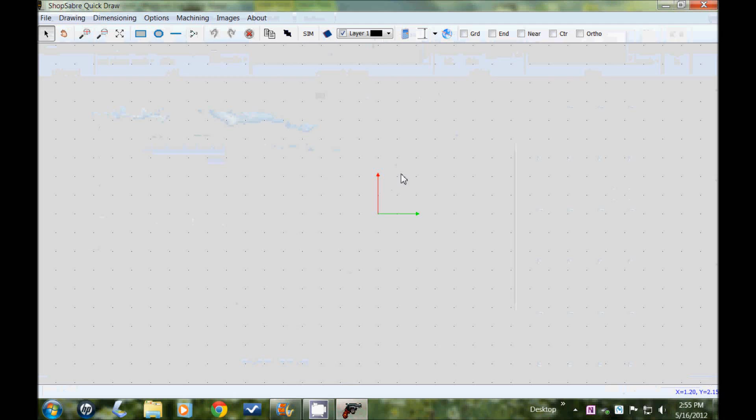What we're going to show you today is how to draw a circle flange using your QuickDraw software for your ShopSabre CNC plasma table.

What you first want to do is select the Draw a Circle icon in your toolbar. Next, draw two circles. It doesn't matter what size these circles are or where you place them, because we're going to use ShopSabre's right-click technology to edit these shapes.

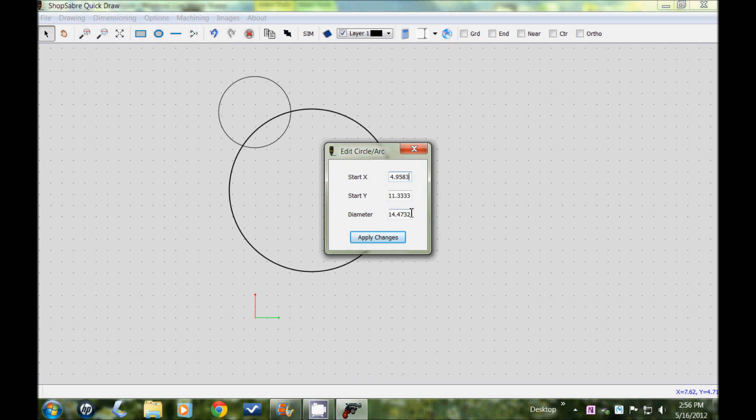Once you have the shapes drawn, select one of the circles, right-click, select Edit, and in this input box make the diameter of this circle 12 inches. Repeat this process on the second circle, but this time make the diameter of this circle 6 inches.

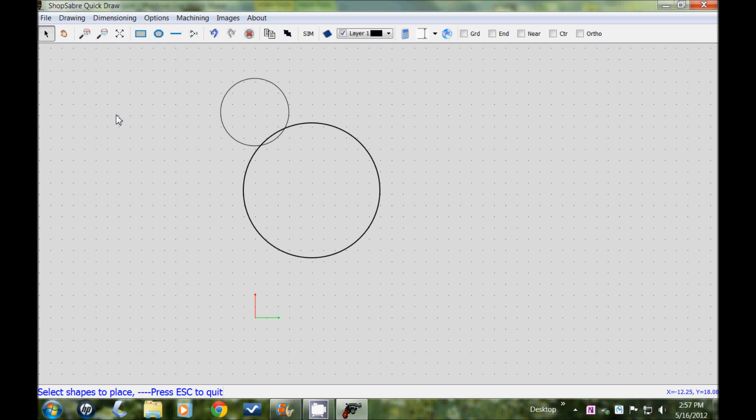Once you have these parts drawn, we're going to use QuickDraw's right-click technology to place these shapes. Right-click, scroll down to Place Shapes, and you'll see in the lower left-hand corner of the input box telling you what steps are next. For our first step, select the outside shape. For our second step, select the shape to place, which is going to be our smaller circle. Now you'll see a second dialog box pops up.

This is where we would set our offsets if we wanted any. For this particular part, we're going to leave the offset set to 0, place the part in the center, and click Apply Changes. You'll see that the circle is now inside of the bigger circle.

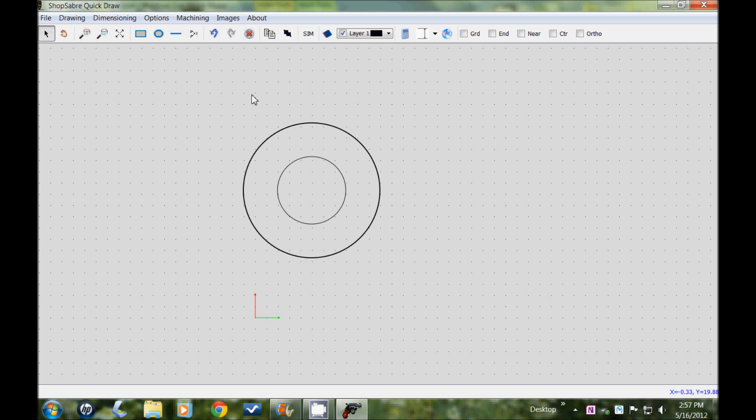For our next step, we want to place a bolt hole pattern around this flange. In QuickDraw this is a very easy step. Select the outside shape, move up to your drawing icon in your toolbar, and select circular hole pattern. A second dialog box will open up, and this is where you set all the parameters for your hole.

Typically in a CAD drawing, it'll list the angle at which the holes will be placed. The nice thing about QuickDraw is you don't have to know the angle. All you need to know is the number of holes, and it'll calculate the angle for you.

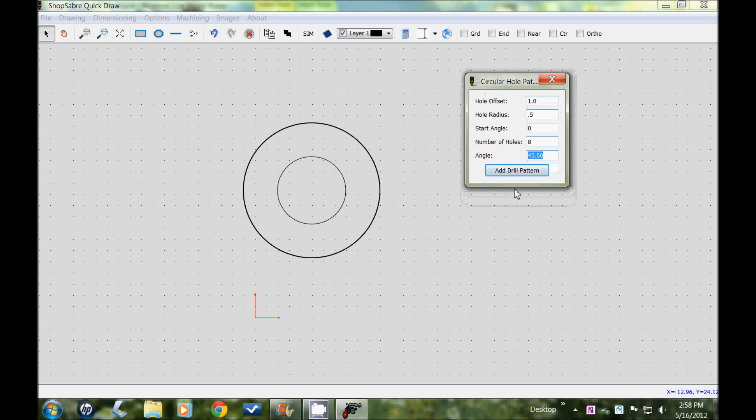So for example, we're going to give this a hole offset of 1 inch, a radius of 1/2 inch, and then set the number of holes. If we have 5 holes, you'll see the angle has changed. For this particular part, we're going to make 8 holes, which places all the holes at a 45-degree angle. Next, we'll add the drill pattern, and the hole pattern will appear on the flange.

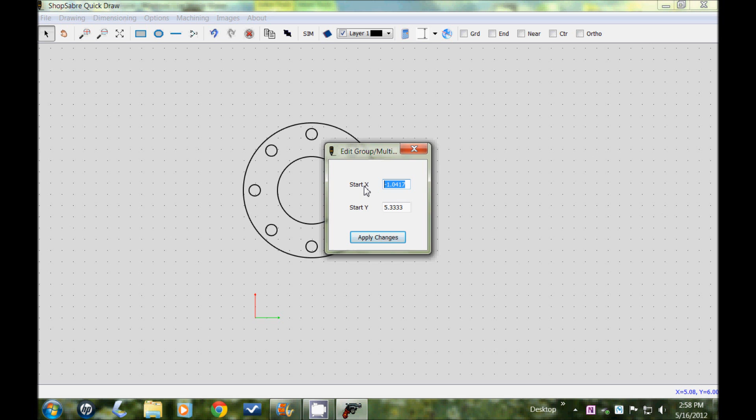Now the next step, we're going to move this flange down into our 0 point for cutting. To do this, simply select the part, right-click, edit, and this is where we'll input a 1/2 inch offset on the 0 for our lead-ins and lead-outs. Change that to 1/2 inch and apply changes.

Now our next step is to actually turn this into a part. This is an important step in QuickDraw, and it's very simple to do. Simply highlight the whole part, scroll up to your group shapes icon in your toolbar, and click that. You'll notice that the inner shapes have changed color. This lets QuickDraw know that this is now a complete part, and it recognizes these circles as inner parts that need to be cut out first.

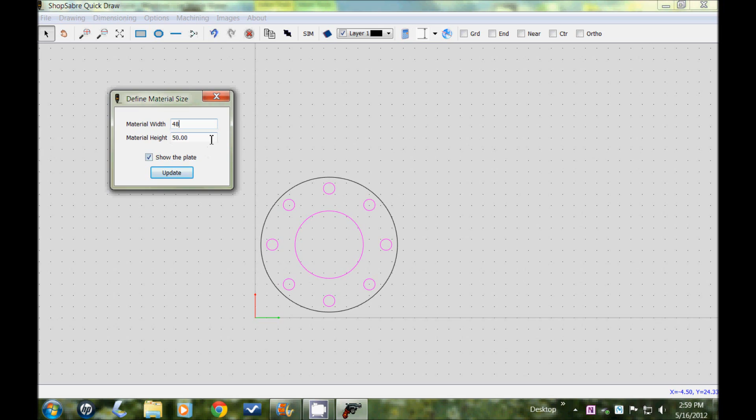Now from here we're going to make copies of this part. First we define our plate. Scroll up to the machining icon, scroll down to Define Plate, and here this is where we put our actual plate size. We're just going to say this is a 4x8 sheet, so 48 by 96, and then click Update. Now you'll see on the screen that we have a defined plate.

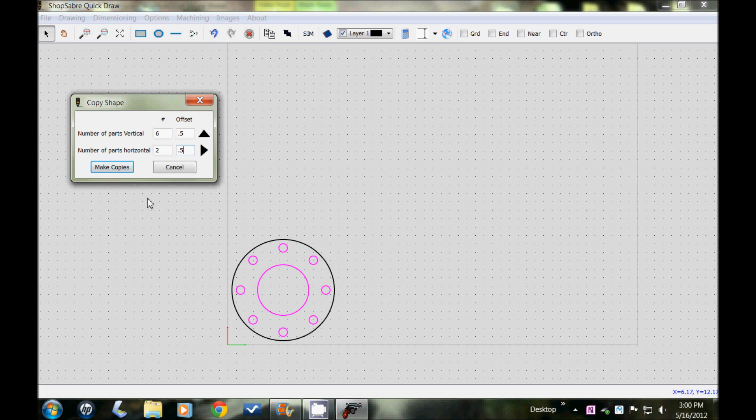Now from here we're going to make copies. To make a copy, simply highlight the part, right-click, copy, and set the number of parts vertically. For this, we're going to make 6 parts vertically, with a 1/2 inch offset, and 2 parts horizontally with a 1/2 inch offset again. Now we'll click Make Copies.

And now you'll see that QuickDraw has placed the parts on this sheet. Now from here, what we need to do is create the G-code for these parts.

To do this, we'll simply select all the parts, scroll up to our machining icon in our toolbar, and scroll down to Cut Strategy, and you'll see this secondary window pop up. In this window, we want to make sure our Save G-code is unchecked, because we're not creating code right now, just the simulation. And we want to make sure the Cut Inside to Outside box is checked. This tells QuickDraw to cut the inside circles before cutting out the piece.

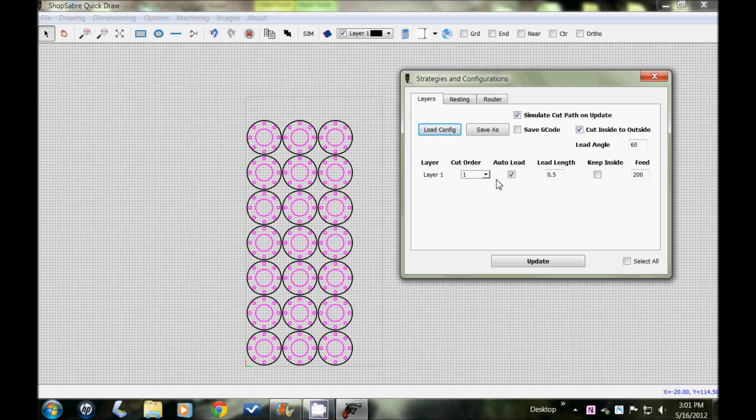We're going to leave our lead-ins and lead-outs as is. From here we'll click Update and then click OK, and you'll see that all the lead-ins and lead-outs have been placed, and we have a cut path.

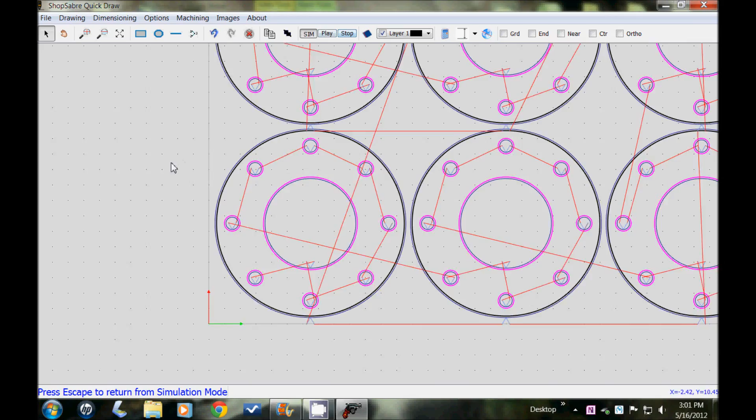If you want to view this cut path, simply go up to your toolbar, select Play, and you'll see the plasma head actually cutting out the part. Now at any time you can click Stop and it'll cycle to the very end of the simulation.

Now that we have reviewed our part, everything looks good, our lead-ins and lead-outs are there. Our next step is to create the actual G-code for the machine.

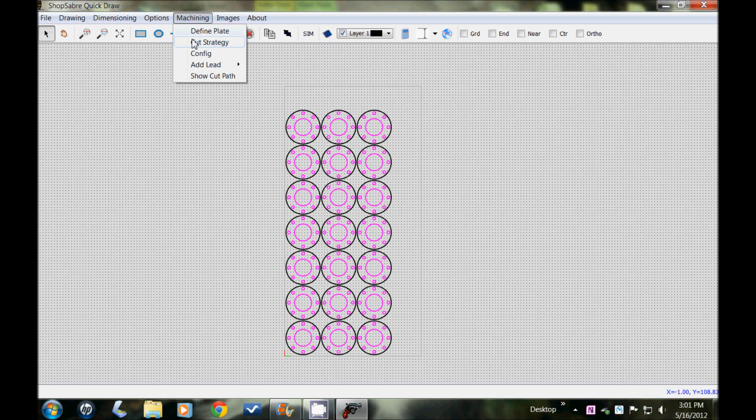To do this, we're going to simply highlight our parts, click on Machining in our toolbar, scroll down to Cut Strategy, and this time make sure the Save G-code box is checked. From here we'll click Update, click OK, and the next one that pops up is where we want to save our G-code.

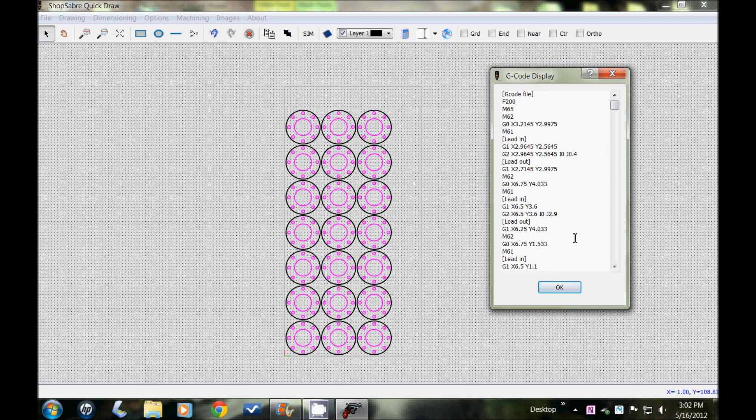So for this, we're going to save it right on our documents, give it a name—I'm going to name it Circle—and click Save. The next box that pops up will be the raw G-code, ready to go to the machine to cut out these parts.